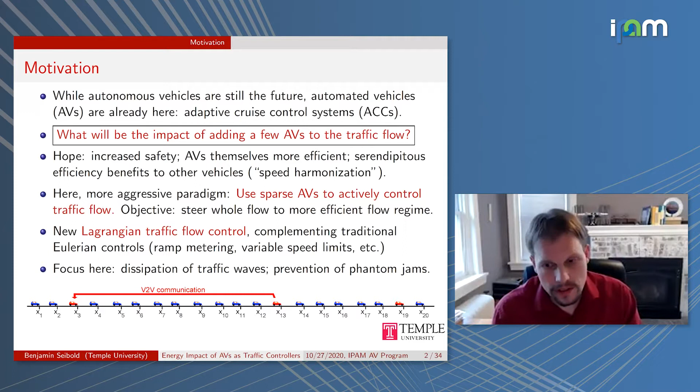And the focus here in this talk is specifically on the idea of, can you dissipate traffic waves and can you prevent phantom traffic jams, okay, via vehicles that are automated, a few of them, as you see at the bottom, that of course might have some information about what's happening downstream through vehicle to vehicle or vehicle to infrastructure communication.

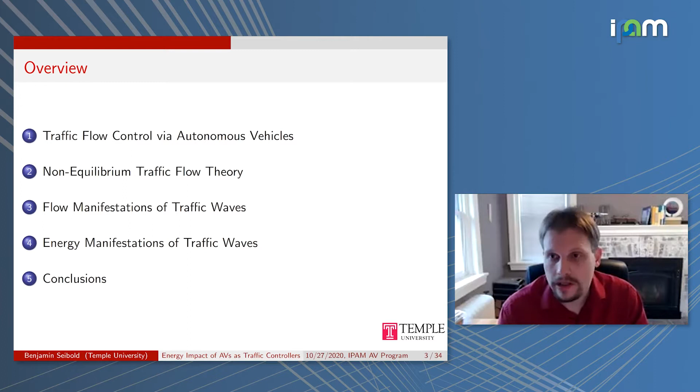So I'll talk about first a little bit about the ideas of traffic flow control via autonomous vehicles and what's established, then spend some time about non-equilibrium traffic flow theory. So what are the mathematical foundations that can guide you? And then specifically talk about the manifestations of these controls, A, on the traffic flow perspectives, and B, on the energy perspectives, and then close with some conclusions and outlook.

If you didn't do anything meanwhile on removing that bottleneck, the idea is now you have one single vehicle, say 40 kilometers upstream of that accident, and it knows about it. What could that vehicle do? The idea is that vehicle could drive in the right lane slower than the rest of the flow, and if the rest of the flow is sufficiently dense, it will actually serve as a moving bottleneck and induce a modified traffic flow state.

Eventually that control vehicle will hit the highly congested region. There you turn off the controller, nothing to be done. You still have the leftover of that state, so you still see the impact until eventually you're back to where you would have ended up if you didn't have a control, but you ended up there by different means.

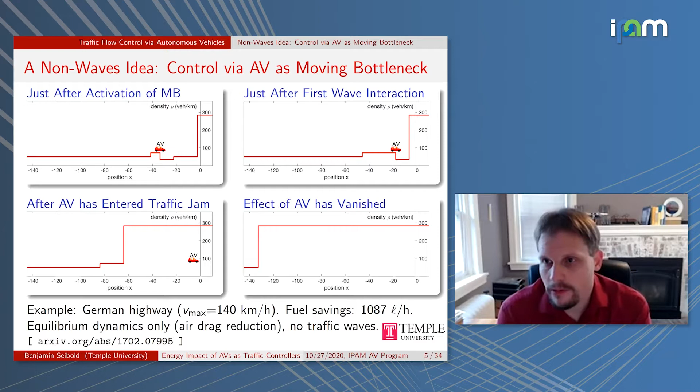So you can affect things on a big picture with just a single vehicle. Of course, that comes at the price of being quite invasive, since you need a vehicle that drives slower in the right lane and serves as a moving bottleneck. Some people might have societal problems with doing such controls, but it's still interesting to explore these possibilities.

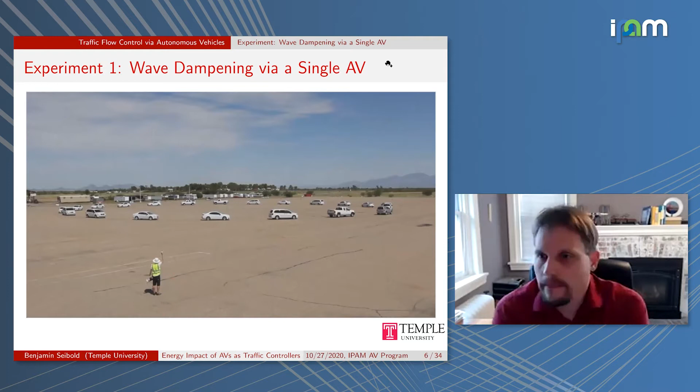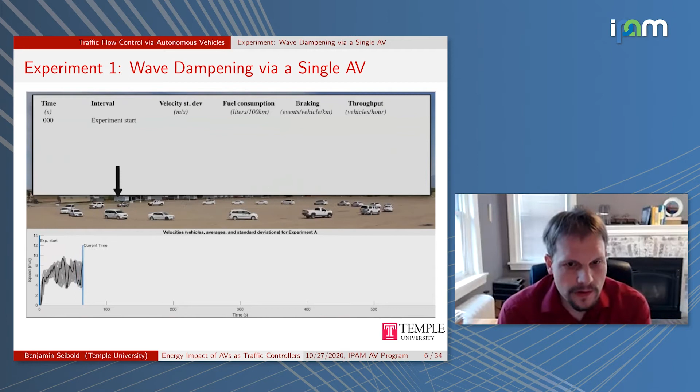This is just one slide on a non-waves idea, just to highlight this. But I want to dive in particularly on stop-and-go traffic waves. This is our experiment that we conducted a few years ago, essentially a ring road, reproducing the example from the Sugiyama experiment, which many other people have also reproduced. You start out with all vehicles on a road driving normally, and then dynamically you get these stop-and-go traffic waves.

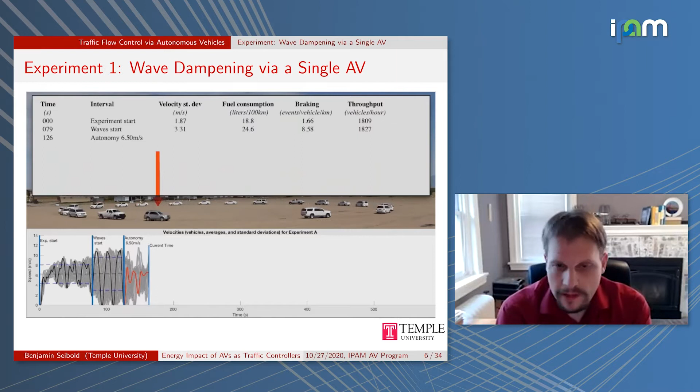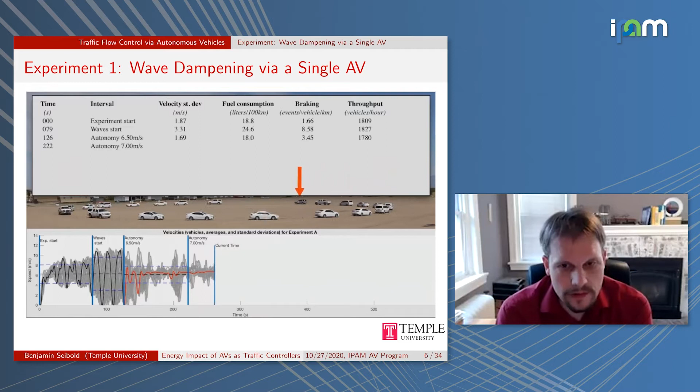Once the arrow turns red, we turn on a controller on that vehicle, designed with a goal to dampen the stop-and-go traffic waves. In the beginning, to dampen the nonlinear waves, it needs to leave a little bit of a bigger headway. But over time, hopefully it can steer the flow into a more uniform flow regime. As we saw in the prior talk, this can be resembled and reproduced in simulation in many ways as well.

Here there's a set point of the controller right now found that yields the smallest amount of velocity variation. With a set point of 7, we explore this controller on a slow time scale at different set points of how one could choose this average speed. The reason is that once you remove the waves, the flow actually turns out to become more efficient, as you see from the throughput numbers.

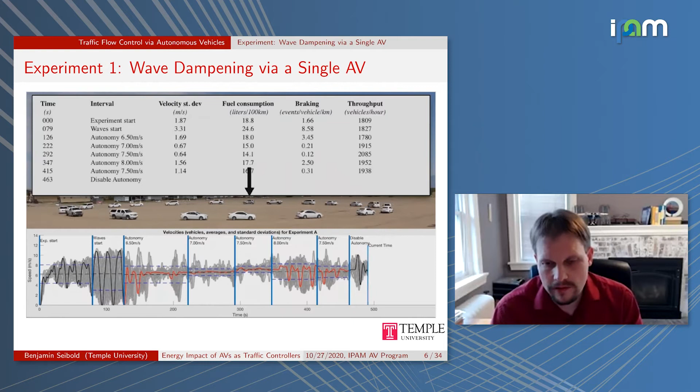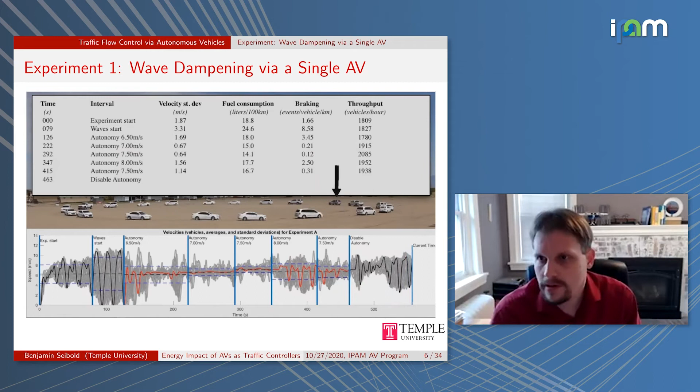After some time, you can turn off the velocity controller and confirm that slowly these waves start building up again. So it's like a dynamic instability -- human driving is just slightly so unstable that it will produce these stop-and-go traffic waves, unless you can control for them. So if one compares the strong waves here in the beginning with the best controller here...

Comparing different metrics, one sees that this kind of sparse control -- one vehicle in 21 vehicles being a control vehicle -- can have a lot of benefits. For example, economically, the fuel consumption turns out to be almost cut in half. And that's the real measured fuel consumption from the vehicles.

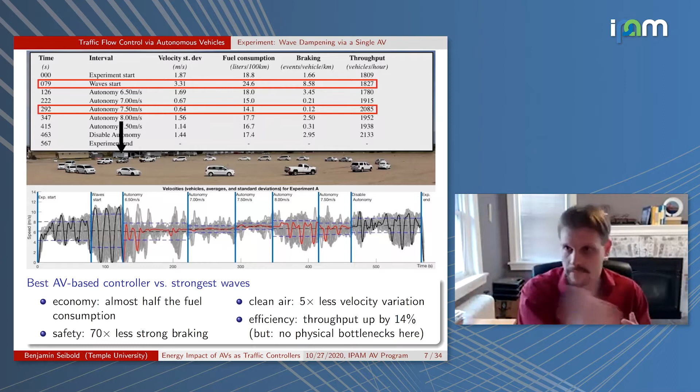70 times less strong braking events, used as a proxy for safety. You have less velocity variation, which translates into clean air benefits and efficiency gains. The throughput turned out to increase by 14%, but there's no physical bottlenecks here, so the flow achieves whatever it dynamically likes to have.

In this experiment, we extracted the trajectories very precisely, applied good quality filtering, validated filtering that gives you good acceleration trajectories, and then you can put models on top for the emissions. You see that not only do you gain a substantial reduction in fuel, you also gain a reduction in emissions. What is particularly important is that not all behave the same way.

It turns out that greenhouse gases are less reduced, but NOx, the stuff we often associate with clean air in cities, actually reduced by 73%. So cut down to a quarter. That's quite substantial if you think about implementing some of these ideas in urban areas and cities.

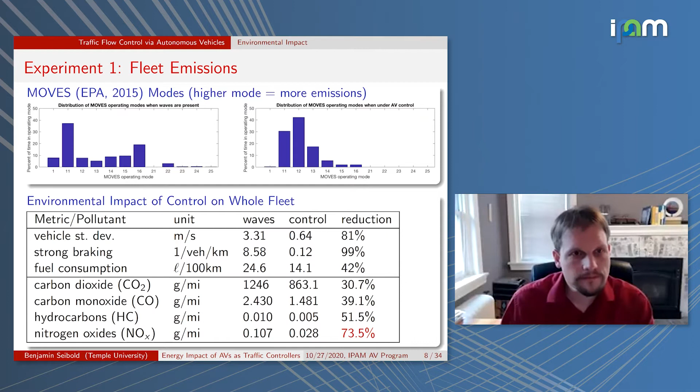And then we told the people, try to close the gap whenever safety permits. And that made drivers more aggressive because they were focusing on gap closing. It turned out that actually turned the flow into giving stronger waves and also a higher fuel consumption. So the driver mindset turned out to be quite important on the waves that you get. In some sense, we pushed the people from relaxed West Coast driving to aggressive East Coast driving, if you like. So it really matters what the mindset of the drivers is.

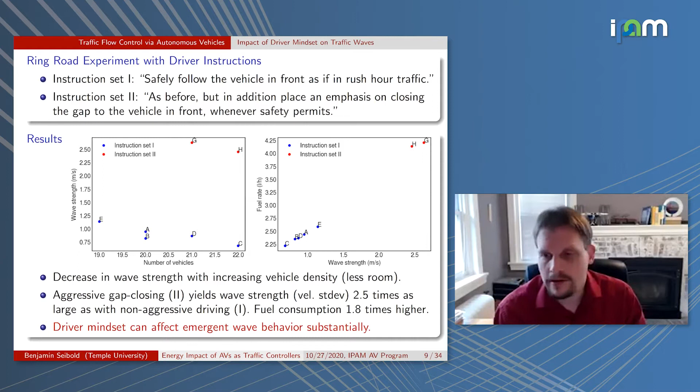This was anecdotal here, but I want to highlight that when people just use an off-the-shelf traffic simulator, these aspects are usually not in there. So doing experiments with real humans to inspire and inform these is an important future work that needs to be done here.

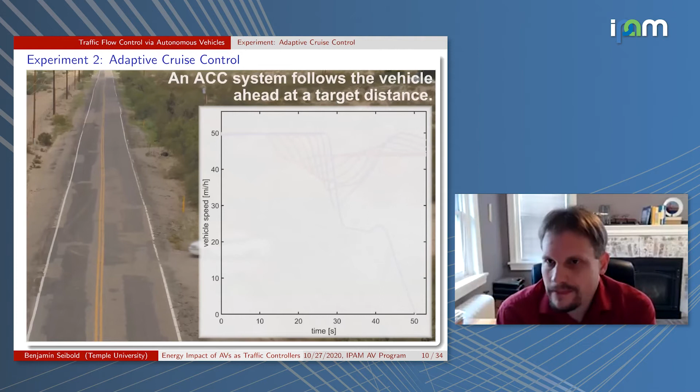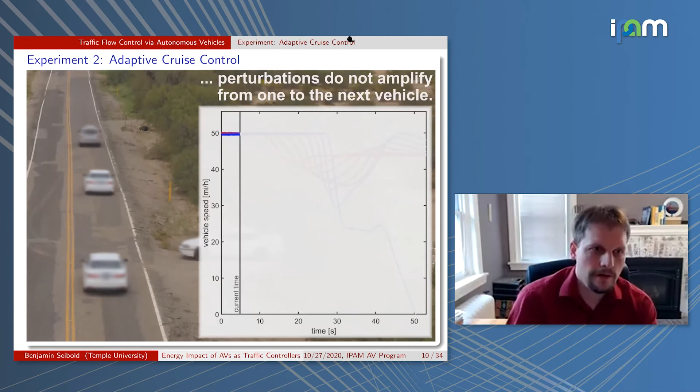So this was mostly based on humans and how a single control vehicle can improve the situation with humans. But like I said before, some vehicles out on the market that you buy have adaptive cruise control systems. So in another experiment we did a couple years ago, we took our lead vehicle here, that's Jonathan Sprinkle's CAT Vehicle, and we had 7 vehicles of an identical make to follow.

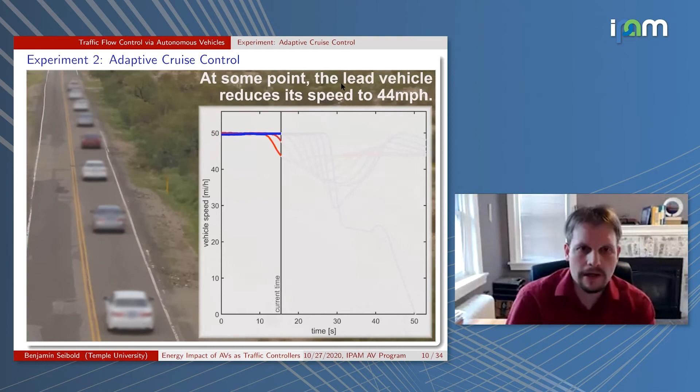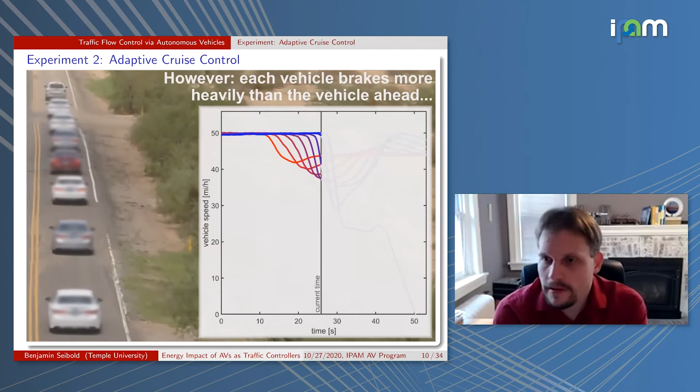At some point, the lead vehicle was reducing its speed from 50 miles per hour to 44 miles per hour. You see here what the lead vehicle did, and then you see how the follow vehicles react to this. Now there's no humans in the loop here, this is fully automated. You just have humans for steering and turning on and off the adaptive cruise controller. But what you see is essentially a lack of stability here again, a lack of dynamic stability.

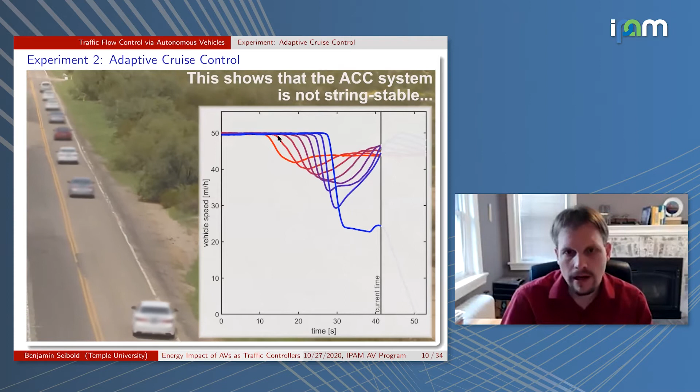So the initial velocity drop here, you see a little bit of an undershoot and then it gets to the new speed, right? But you see that the undershoot increases more and more from vehicle to vehicle until the last vehicle is knocked out of the adaptive cruise control system and then pulls over here.

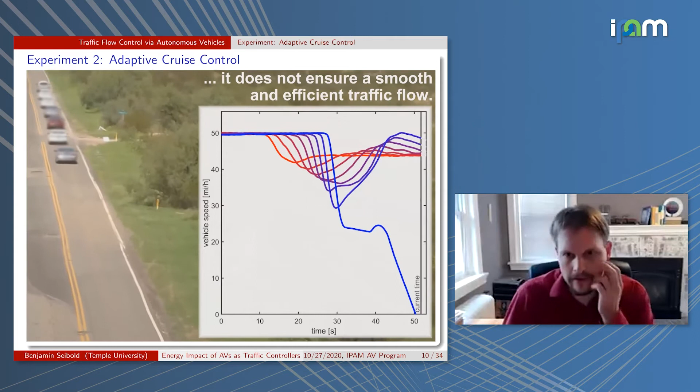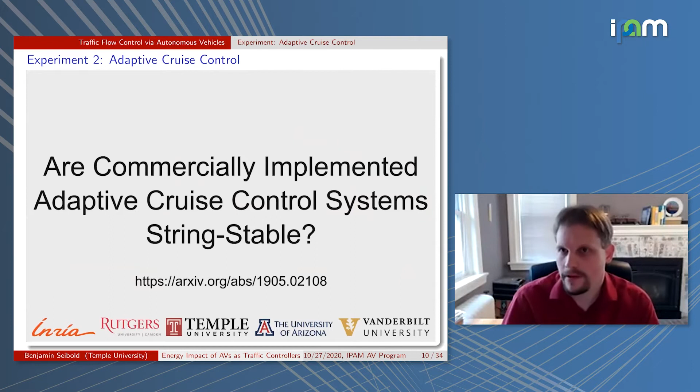So imagine having a chain of 7, 8, 10 of these vehicles on a roadway, which of course does not really happen yet, the market penetration rate is too low of these vehicles, but imagine that were to happen. And this is not being improved via software updates, and that could be a real concern.

So also stability, dynamic stability. The first vehicle looks still okay, right? It's undershooting a little bit, but when it builds up, these are really concerns one needs to have looking at the system level performance of these systems.

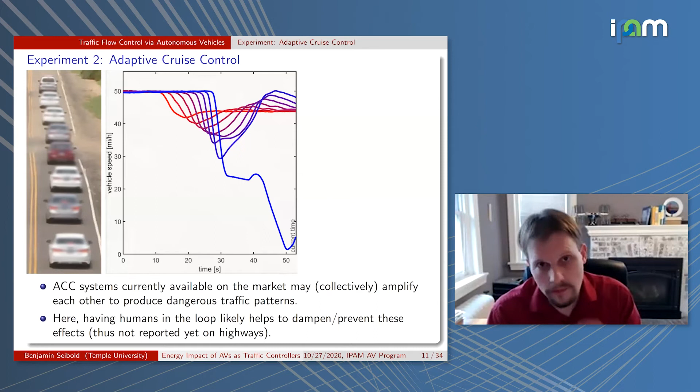All right, so the questions and tasks are essentially assuming that a few automated vehicles are successful at wave dampening and suppression. The first hope we can have is that they kill the waves, by essentially reverting the flow back to a uniform flow state.

So if you think of that ring road, you started out with a uniform flow, then the waves started developing. The hope is that you can undo that. So without going into details how to exactly do this, the exercise essentially becomes to understand how much worse the waves are compared to the uniform flow you started with initially. So it doesn't actually become a control question, it becomes a question of understanding the waves.

And that's the key exercise that has to be done first. Then the second question is, how well can a designed controller get close to this theoretical optimal controller? So the question is, how bad are these traffic waves with regards to, A, flow properties, and second, energy consumption.

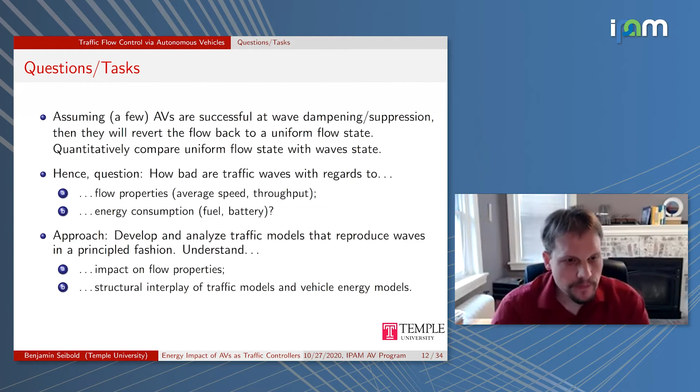To get started on understanding this, let me present a little bit of theory here. I'll go a little quicker since I've covered this in other talks, which you can look at online recordings of.

On the other hand, you have macroscopic models where you have a traffic density that is a function of position on the road and time, evolving through partial differential equations. Here we have a first-order hyperbolic system, the Lighthill-Whitham-Richards model, the LWR model, or a second-order model, the Aw-Rascle-Zhang model, the ARZ model—suitable adaptations of fluid dynamics and gas dynamics that give the evolution of the macroscopic quantities of traffic density and traffic flow rate that one cares about.

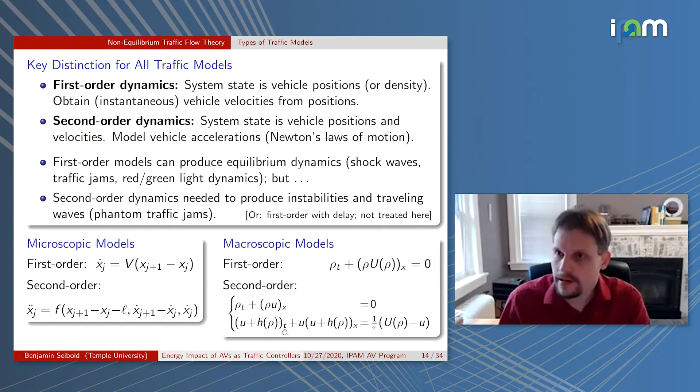Now, the key point is that first-order dynamics can represent essentially equilibrium dynamics, including shockwaves, traffic jams, red-green light dynamics, but dynamic instabilities—phantom traffic jams and so on—are not produced by first-order dynamics. You need second-order dynamics, or some other effect like first-order with delay, which I'm not focusing on here. In these instantaneous-in-time state-space models, you need second-order dynamics to produce these effects.

So in microscopic car-following models, essentially, for example, on a circle—could be a long road as well—you have vehicles at positions. I'm using the convention that vehicle J follows vehicle J plus 1, so they are ordered as you go downstream along the road. The second-order model dynamics is essentially that the vehicle acceleration is some nonlinear function f of the gap s to the vehicle ahead.

The gap is front bumper minus front bumper of the two vehicles, minus the vehicle length—for simplicity, I'm assuming all vehicles have the same length and are identical. So it's a nonlinear function of the gap, the rate of change of the gap (which is the velocity difference), and then your own velocity. You then assume the model has a uniform flow in which all vehicles are equispaced and go at the same speed, and you linearize around this uniform flow.

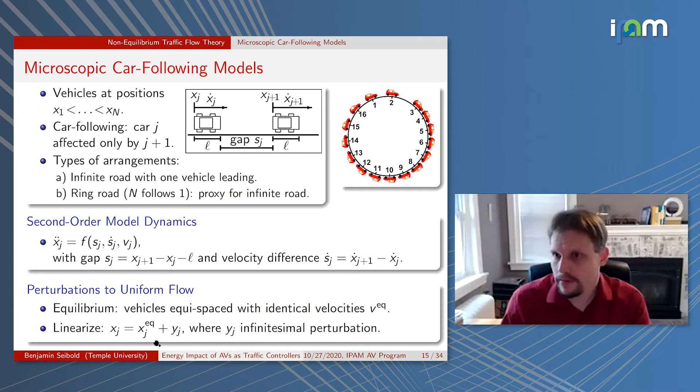As a standard exercise, you find you get a linear cascade system where the coefficients alpha 1 to alpha 3 are the partial derivatives of that nonlinear function with regards to its arguments, evaluated at equilibrium. Then you see that the jth vehicle is just affected by what the j-plus-first vehicle does. That, of course, cascades through your chain, your beads of vehicles on the chain.

And then you see that if you look in frequency space, doing a Laplace transform ansatz, you get that the jth vehicle's behavior is given by the j-plus-first vehicle's behavior via a transfer function, which for these models looks like this. It doesn't matter so much—you can look at the Bode plot, standard engineering approaches, and understand when you have stability.

You have stability if this transfer function never produces a vehicle with a higher amplitude of perturbation than the vehicle ahead, meaning that along the imaginary axis, for purely oscillatory modes, the modulus of this transfer function is always less than or equal to 1. This translates to a simple algebraic condition to check.

The idea is that humans, based on what we saw before, slightly violate this condition. So this number would be slightly negative for a certain regime of density states that one cares about, where traffic is still flowing, but is quite dense.

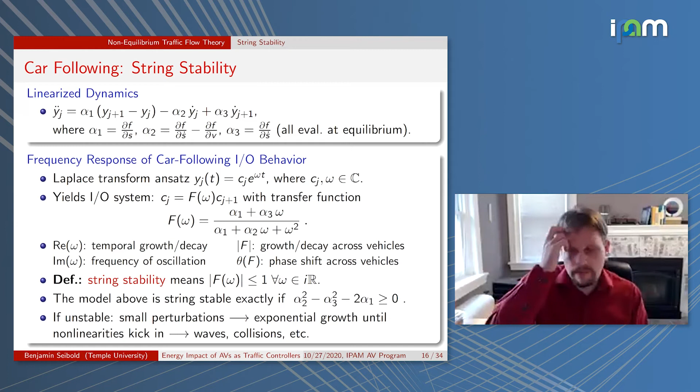In this unstable regime, small perturbations that constantly happen, infinitesimal but small, result in exponential growth of some wave numbers, until the nonlinearities kick in. Then this linearization doesn't cover the behavior anymore, and you get other effects. For example, you could get vehicle collisions in some bad models, or nonlinear traveling waves in some well-designed models.

So, if one just looks at preventing traffic waves and keeping the uniform flow stable, one can immediately study these systems from the point of view: what if I add a few automated vehicles? What if I have a few vehicles follow a different function with a different induced transfer function, G, with parameters beta 1, beta 2, beta 3 that are different, but has the same equilibrium solution, leaving the same spacing when there are no waves.

Then one can do the same kind of analysis and get a similar stability criterion, with gamma being the penetration rate of your control vehicles. You need the transfer function f to the power 1 minus gamma, times g to the power gamma, to be less than or equal to 1 for all frequencies omega that you might encounter. You can also do some analysis on this.

Think of a ring road with 100 vehicles, with 10 control vehicles. An interesting fact that follows from this analysis is that the stability properties of the system are independent of the relative placement of your control vehicles. You would get the same stability behavior whether you place them equispaced, every 10th vehicle being a control vehicle, versus all 10 in one cluster with the rest uncontrolled.

That was one thing that bothered us for a while, because that cannot be true in reality, right? That you can take 1,000 vehicles, not have any control vehicles nearby, and still stabilize it.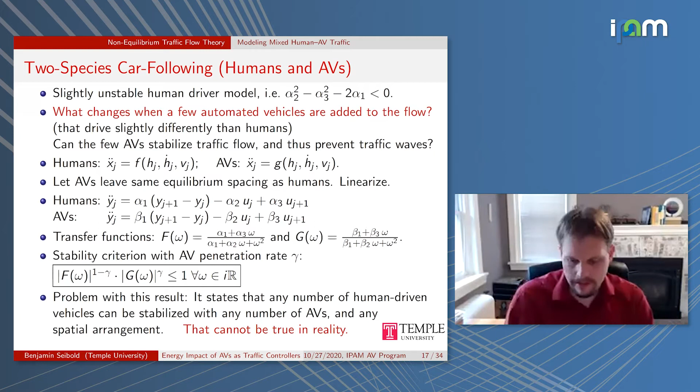One thing we understood is that, of course, having a system that is stable, in this case asymptotic stability, doesn't mean that the system remains close to equilibrium. That's a really interesting consequence we noticed for the following reason.

If you think of the system constantly being exposed to noise, written as a stochastic differential equation, what happens when you have just one single control vehicle and then a long chain of slightly unstable vehicles is: you have a single kick to one vehicle, and that kick goes upstream in the vehicles, amplifying a little bit each time, until it wraps around. There's a ring road, then the red control vehicle dampens it.

So as t goes to infinity, this one kick decays, so the system is asymptotically stable, all the eigenvalues on the left half plane. But at transient times, you get actually a transient growth that could be very big, and it's bigger the more vehicles you have behind each other without a control vehicle in the way. So while the system is asymptotically stable, that does not mean it remains close to equilibrium if you have small, non-infinitesimal but actually small perturbations, because you get that exponential growth.

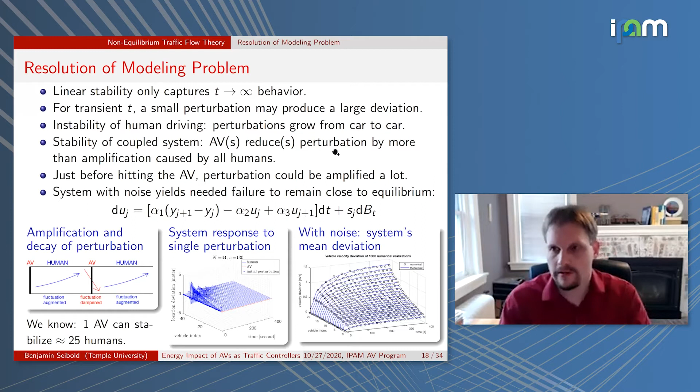So there's a lot of interesting structure also in understanding these microscopic models. One can look at microscopic car-following models, for example, the intelligent driver model, optimal velocity model, follow-the-leader model.

Without going into detail, you can pick one of these models, calibrate it either rigorously or in the eyeball norm to reproduce quantitatively some of the flow behavior observed in experiments, as is done at the bottom, including the fact that you want, at that equilibrium flow on that ring road, the flow to be unstable.

In both scenarios, identical left and right, all vehicles are human controlled, but the blue vehicle on the right will be turned over to a smart velocity controller at t equal to 120.

But before that, you see that traffic wave that has arisen. And now the goal is, once the vehicle is turned on the right - look at the bottom right - it's turned on the velocity controller.

The goal is now that it follows a different law, but only that one vehicle. The rest of the cars remain in their unstable state. But this vehicle succeeds in keeping the flow at bay and brings it closer to equilibrium, modulo little noise

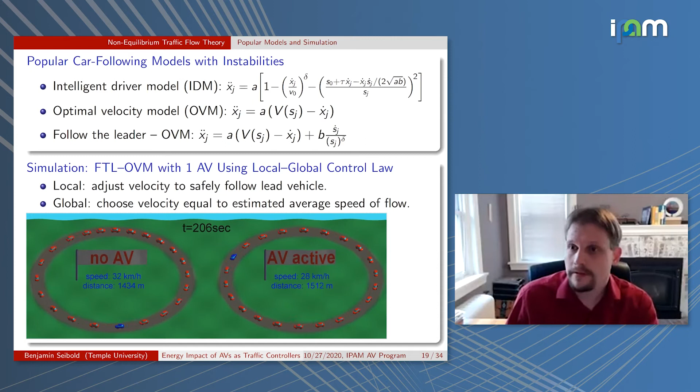that is constantly added to the perturbation. And there's also, you see, the blue vehicle has gone further now, so it has resulted in an efficiency gain in the flow rate. So these results that were shown in the beginning experimentally can be reproduced via models - in this case, microscopic models.

Now I want to highlight also macroscopic models. Why does one care about macroscopic models? Well, a few reasons. They describe the variables that are oftentimes measured, namely flow rate, densities, bulk throughput of roads,

bulk speeds, directly. They don't track individual vehicles, so they are scalable to really large urban systems in potentially a real-time setting, but you're choosing big cells when discretizing these models. In a cell transmission framework, they provide nice frameworks to input sparse data. There's also privacy aspects and other aspects where you don't want to track individual vehicles.

So there's a real role for these macroscopic models in transportation engineering. And one point is that one can also reproduce these phenomena, in particular instabilities and traffic waves, in these macroscopic descriptions. For example, here, one possible form, the Payne-Whitham model here, but it's the same for the Aw-Rascle-Zhang model for the experts in the room on these models.

So you have a hyperbolic part, and then you have a relaxation term here. So the speed of a vehicle relaxes in time towards the desired speed function, capital U.

Now, if you have these kinds of models in the structure, they have two speeds of information propagation here, which are the eigenvalues of the hyperbolic part's Jacobian matrix. Those are the two speeds of information propagation - one traveling backwards on the road, one traveling forward on the road.

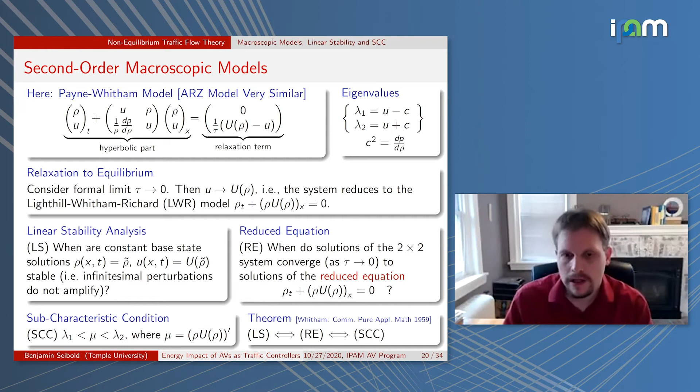If it's violated, then you get traffic waves. You get traffic waves, and these traffic waves can now be found by making essentially a traveling wave ansatz.

So taking the equation, the system, and saying I want to look only at solutions that are just dependent on a single variable - that's a traveling wave. So x minus st, where s is the unknown traveling wave speed.

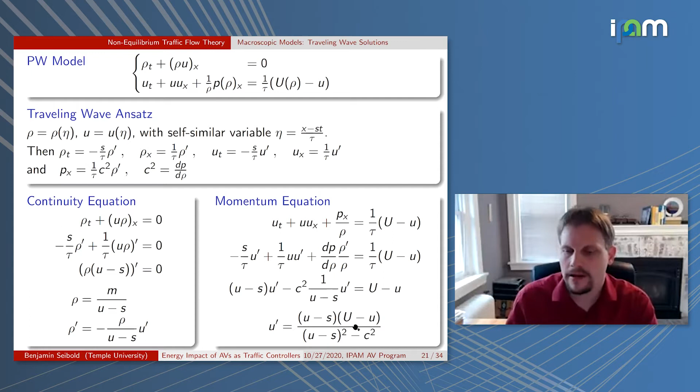You substitute in the first equation, you get a relationship between rho and s using one constant of integration, which is m, the mass flux of vehicles through the wave. Then you take this, make the same ansatz in the momentum equation, the second equation, use substitutions, and you reduce your 2x2 system of PDEs to a single ODE, a scalar ODE.

That is your Jamiton system. There's a little bit of detonation theory that needs to be applied to find the relationships between M and S. I'm not going to go into any details here.

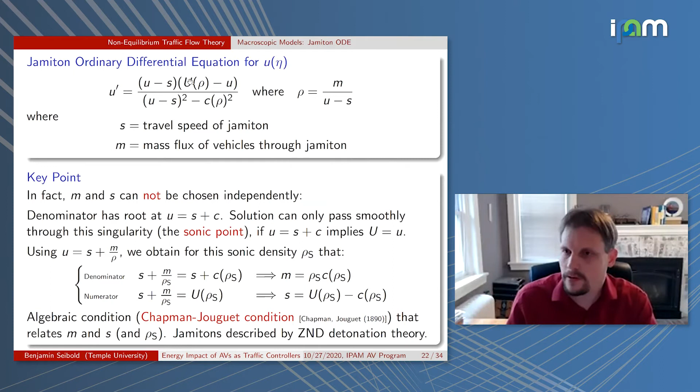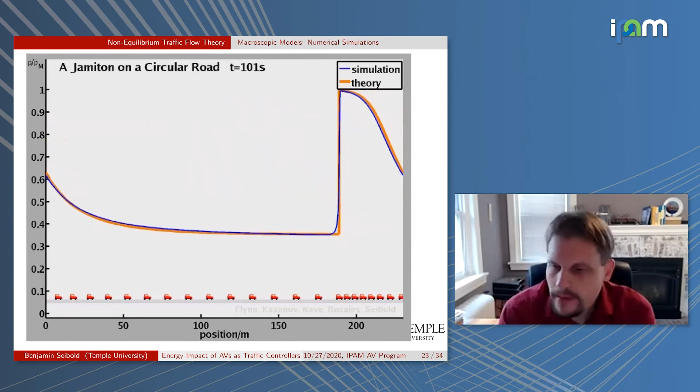You get these dynamic instabilities, but I can also predict a priori what this traveling wave will be as t goes to infinity, and it will essentially be this detonation wave, this orange curve. At the bottom is a visualization of what this means to the individual vehicles: what comes out on the right comes in on the left.

But the simulation here, the model is carried out in a macroscopic sense, so one can reproduce the same kind of behavior via partial differential equation models as well. Now, one important fact is how this all manifests in the fundamental diagram. The fundamental diagram of traffic flow is really one of the key ingredients in traffic flow theory and traffic flow engineering. Essentially, you plot the flow rate of vehicles as a function of the density.

So if flow had no instabilities, it would always lie on that curve or close to it. But in reality, of course, you have these instabilities. One can then show that whenever you have nonlinear traveling waves, each of these waves forms a straight line segment in a fundamental diagram. This can be seen by starting from the continuity equation, which just means conservation of vehicles.

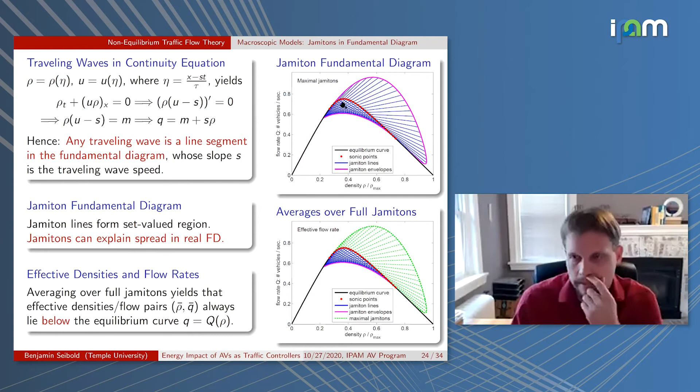And if you have a traveling wave, then the consequence of this is that the flow rate is just m plus s rho. So it's an affine linear function of the density, where m is the mass flux of vehicles through that wave, and s is the traveling wave speed of that wave.

So here you will have some waves that travel forward on the road, and here some that travel backwards on the road in this model. This set-valued part of the fundamental diagram is produced organically through these models just by stop-and-go traffic waves. Of course, in reality, other aspects also contribute to a spread in a fundamental diagram, like heterogeneities of cars, but this is the manifestation of these waves.

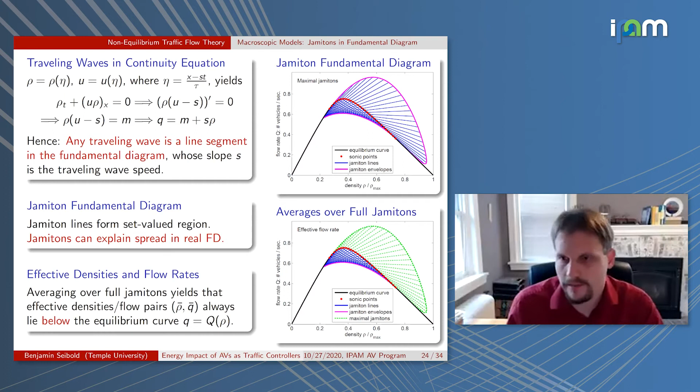This is the point-wise evaluation along these waves. If you now average your total effective density and total effective flow rate over the whole wave, the set of all the averages would form a set below the fundamental diagram. So whenever you have a wave state, you are generally below the fundamental diagram, meaning for the same average density you actually get a lower throughput, a reduced throughput. All of this can be explained and constructed via this non-equilibrium traffic flow theory.

So with that established, we should now look at how this manifests, starting with what are the manifestations of traffic waves onto the flow. Here's again a simulation of the intelligent driver model. It's a long road, 8 kilometers, with 300 vehicles placed on it, initially uniform, and the model chosen so that for this average density, it's a ring road again, but really long.

So these waves have space to breathe, right, they can do whatever they dynamically would do. It's a simple way to still have a ring road where you control the density, but make it really long so you see what the vehicles do without constraining the waves to the periodicity of the ring. Before you saw a 250 or 300 meter road experiment; here this is more than 8 kilometers, with 300 vehicles placed and chosen so that for this average density, the flow is dynamically unstable.

Then you add a little bit of persistent noise to the model, and you see that slowly in time these waves develop, and then you get these strong traveling waves that go backwards along the road, and the vehicles run through them, and in between here they even come to a full stop in this intelligent driver model. In other models they might just get very slow, but essentially you get these strong velocity variations.

Now, this is the vehicle trajectories, and you can plot them, looks neat and so on, but what does it mean in a fundamental diagram? One way to reconstruct densities and flow rates from these vehicle trajectories is essentially using kernel density estimation techniques.

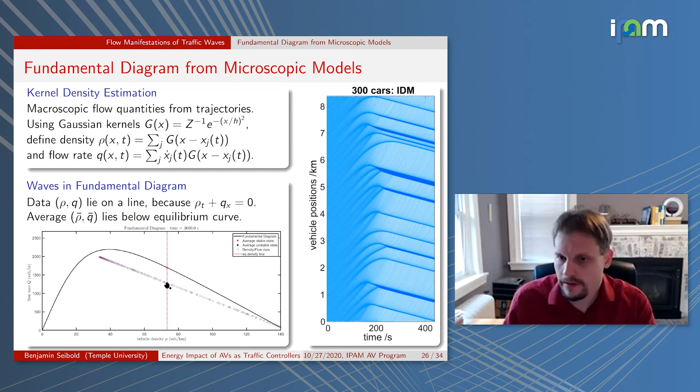Now, again, this is a ring road, so there's no physical bottlenecks. So what will happen in the fundamental diagram when you get waves as you move down? We looked at this and said, well, real roads are not ring roads. So what are the scenarios that can happen? Where does the point move in the fundamental diagram from the original equilibrium state down to when you have the waves?

We came up with essentially three key scenarios. One is, and here you see the simulation, start with vehicle positions here - just the dots - and then the vertical position is the speed. That's one way to visualize these waves. So here you have fast speeds where the vehicles are far apart, and here they're stopped in between. This is an unstable regime of the intelligent driver model.

As we saw before, when you have humans only, you start out in the fundamental diagram and develop instabilities, you move down here. Then the idea is, of course, if you now had an AV-based control - a few control vehicles that can drive it back and dampen these waves - ideally the best possible controller, the optimal controller you could design, would move you back up here.

A suboptimal controller would lie somewhere in between here. So you get this nice regime. Now that's for a ring road.

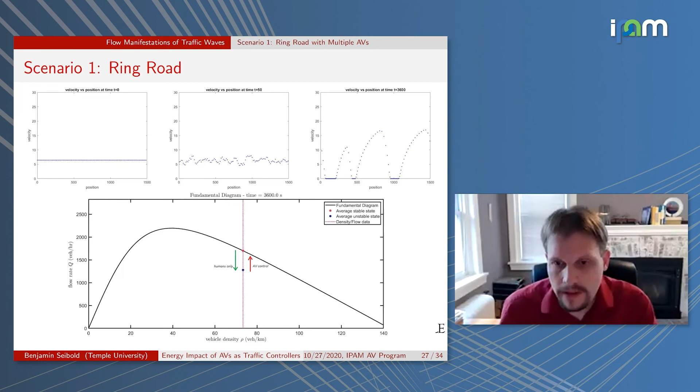Another regime is you have one lead vehicle that drives at a fixed constant speed, a leader of the pack. Nobody can overtake. If you drive in an HOV lane, that's not an unusual situation.

Then you have vehicles behind, and you see that after some time, the lead vehicle drives at a constant speed. The vehicles behind are relatively uniform still, as we saw also in the experiment before. When you had the ring road, the vehicles behind had very little oscillations, but as you go further back, you get more and more stronger oscillations.

Now, in this case, the speed is fixed. So any vehicle behind, even in the presence of waves, on average has to drive with the same speed as the lead vehicle, because if not, it would either fall behind or eventually hit vehicles ahead. So it has to go with the same speed.

Now, the speed on the fundamental diagram is the line that goes through the origin. So here you can also show that, in fact, theory predicts you have to lie on that line. And you see that, in fact, the simulation confirms this.

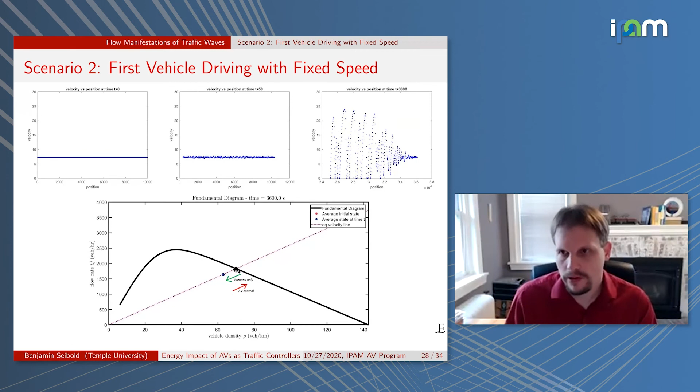You move down here along this line, and then the optimal AV controller would bring you back up. And the third regime that we focus on is...

You have a stretch of road, an outflow, or a physical bottleneck somewhere that limits your throughput fundamentally. So flow cannot exceed this horizontal line here. And you see these waves here, but essentially what happens in the presence of waves is that you move sideways, still under the fundamental diagram.

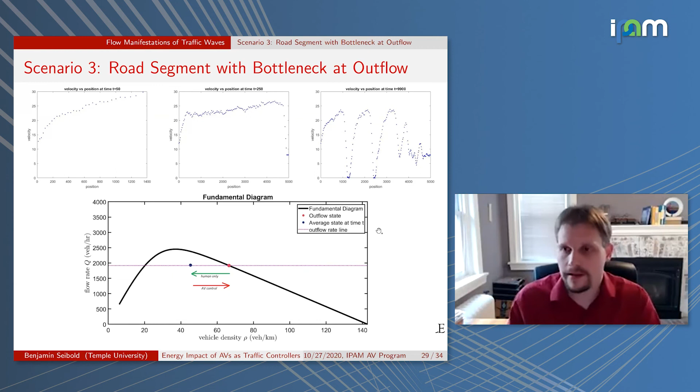And then if you have AV controllers, you could push yourself back up here, right? So you get fewer cars on the road segment when you have these waves. They spread their elbows essentially when they have these waves. So this establishes a lot of fundamental understanding on how these things look and behave.

Now I want to leave it here to just give you a glimpse on what one has to consider when looking at the flow manifestations. The last aspect I want to highlight is energy manifestations.

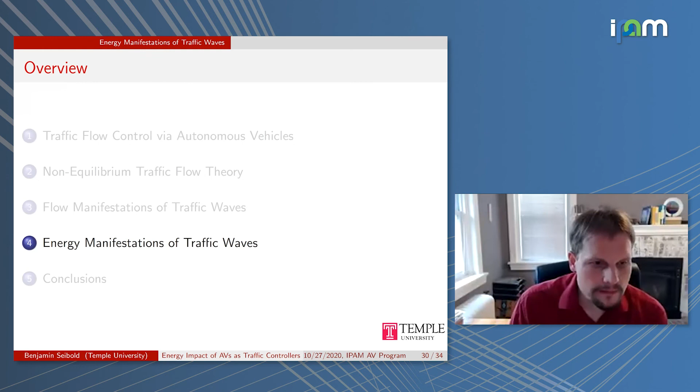This is an ongoing project where we look at energy models: energy consumption, fuel consumption for combustion vehicles, battery depletion for electric vehicles and hybrids. It's really complicated. It does not just depend on the instantaneous fuel consumption rate of a combustion engine, or what the vehicle is currently doing in terms of driving behavior—it depends on a lot of other things. But dominantly, it's affected by essentially instantaneous speed and acceleration.

So essentially, we're working on a pipeline that produces these models, where the instantaneous fuel consumption rate—in this case, this is in collaboration with Toyota—so we have the Tacoma vehicle, Toyota Tacoma, as a nice traditional fuel consumption vehicle.

So what we say is, yeah, that's very vehicle specific. We want to capture the key quantitative behavior of these models, but average out the gear shifting effects and other aspects, and produce simplified models with the idea that it still represents typical vehicles. We don't want to design energy metrics that specifically exploit the gear shifting set points of these vehicles, because in reality we don't want to assume the whole traffic flow is Tacoma vehicles, but similar types of vehicles.

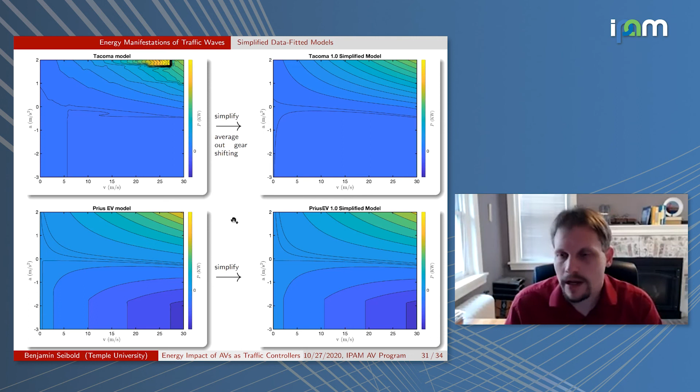And then one can take these intelligent driver models and look at what happens when you put energy evaluations point-wise, but then averaged over the whole simulation, and compare in particular with what if you had a uniform flow—which we test by taking the same model with the same fundamental diagram, but changing the parameters in a smart way so that the dynamics become stable, but otherwise everything the same, so that you just simulate uniform flow behavior.

And then you compare it with a simulation where you get these waves, and study the fuel consumption and energy metrics, energy demand for the electric vehicle in the strong waves regime, and essentially compare these two. And then you look at the percent decrease in energy consumption that arises as a function of the background density that you encounter whenever you have waves here.

And you see the following function: for the Tacoma, you get this blue curve, so you get a percent decrease in energy consumption here of up to 75%. This is really, really significant, really tremendous. And I want to put a warning here.

These high efficiency gains are the theoretical maximum that could ever occur with the best possible controller. And second, these waves in this parameter regime of the intelligent driver model, a standard regime people use, are really strong, really extreme waves. So a word of warning: if you use these models off the shelf, take this with a grain of salt. Ongoing work in our team aims to get better calibrated models, but for now this is an existing off-the-shelf model, slightly fine-tuned, and it still gives a good guideline.

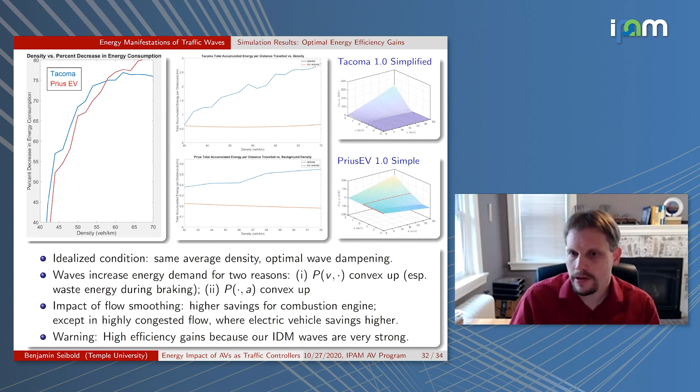And when you think of stop-and-go traffic waves, you're not driving along the A equal zero curve, but constantly accelerating and braking, so regenerative braking makes a huge difference—which is why the energy gains from wave dampening are less for an electric vehicle than a combustion engine vehicle in this medium density regime.

One really interesting aspect we found is that at really high densities, it's actually the other way around. That bothered us for a while, because you still have regenerative braking versus no regenerative braking. There are many interesting aspects depending on vehicle type. In short, combustion engines have an optimal driving speed as a minimum—if you drive slower you consume more fuel per distance and become less efficient—whereas electric vehicles become more and more efficient the slower you drive. That's the manifestation of these different aspects, so the energy gains relative to how the rest of the flow is composed are quite interesting and non-trivial.

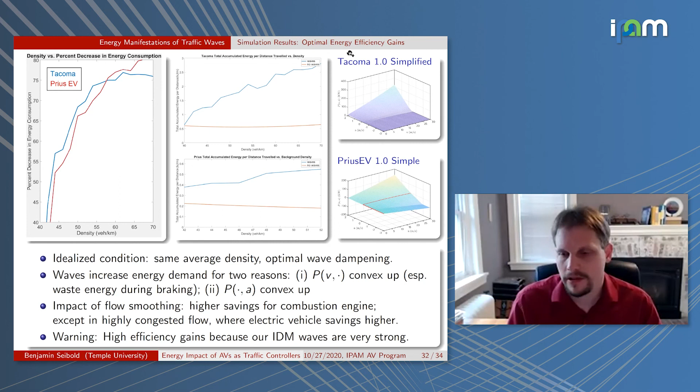Now leaving it here just as a glimpse, let me finalize with the conclusion. First, vehicle automation is happening—not fully autonomous vehicles, but automation like adaptive cruise control. We need to understand the pitfalls and opportunities arising from the resulting heterogeneous system dynamics. Humans still dominate the flow on the road, so we're far from AV-only solutions like platooning, which are being explored, but right now it's just a few of them.

So the idea is: can we already explore Lagrangian traffic flow control right now? A few control vehicles can make the flow more efficient. One nice thing here is there might be a free lunch, because these automated vehicles will be on the road anyway—so why not deploy them for a greater good?

You saw some information on the optimal efficiency gains achievable with perfect controllers, and they're quite good—whenever you could cut the energy demand of unsteady traffic in half, potentially. So they're quite promising, and you can also get flow efficiency gains—pumping more cars through the road, which would have real interesting benefits.

I want to close by pointing out that the key challenge in designing such controllers is not so much smoothing the flow—that turns out to be not so hard if you know roughly what you're doing. The real challenge is designing controllers that do that in a socially acceptable way, both to the driver or operator who turns on flow smoothing or optimal velocity control, and to the drivers behind who might get annoyed by someone leaving huge gaps for flow smoothing purposes. That is, as I see it, the key open question that still needs to be addressed in future work. Thank you very much.